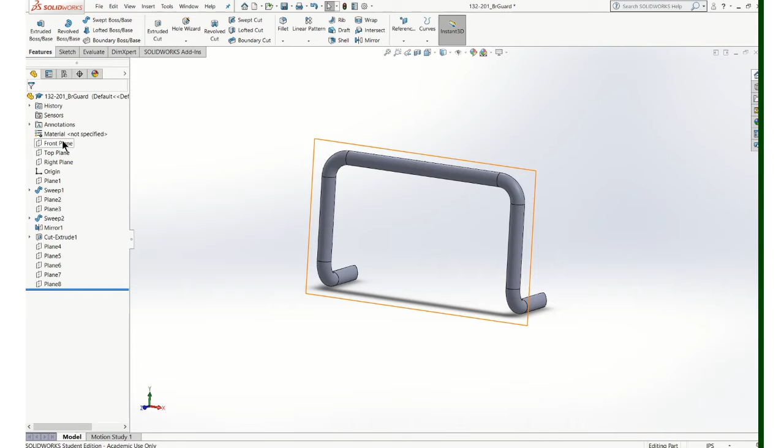Now, in order to constrain tubes, you're going to have to use work planes because you can't constrain to just the cylinders. So what I'll do is open up the individual parts, and I know that I'm going to need a work plane across here, and it's 9 inches down from the top. So the way I built my model was pretty much everything around the origin, so that's a really good way to do that when you're working with tubes, because then it's easy to just offset those by known distances.

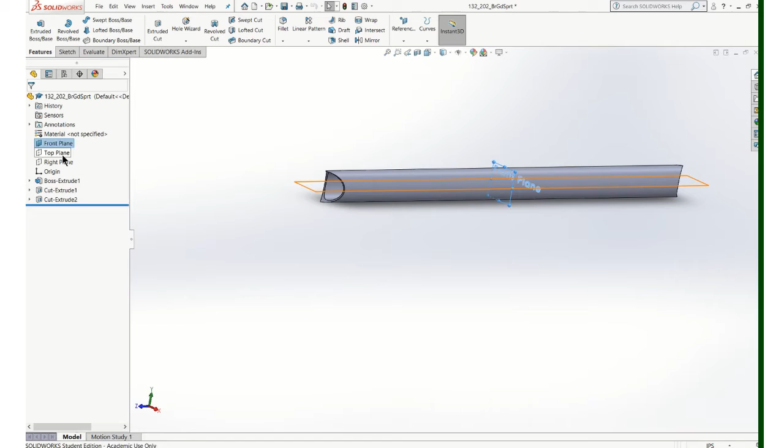So I'm going to take this plane and I'm going to offset it down by 9 inches because I know that that's where that tube goes, and I think I'm good with that. I will turn that one off for now. Likewise on this tube, turn all my planes on. Now if you don't have the planes, if you didn't build your model that way, you're just going to have to add some more planes by doing offsets.

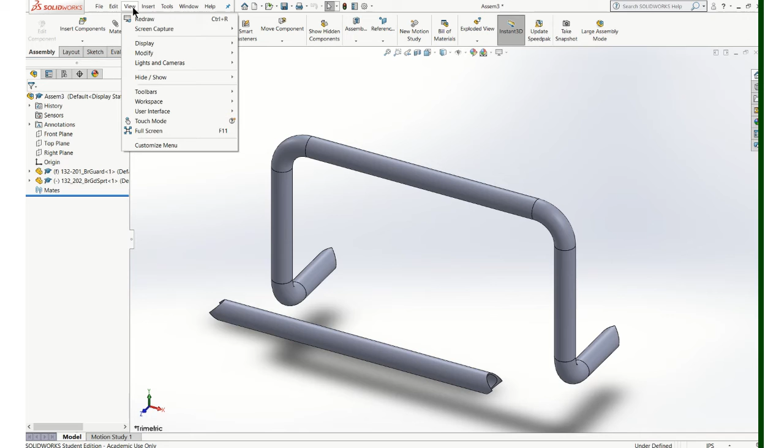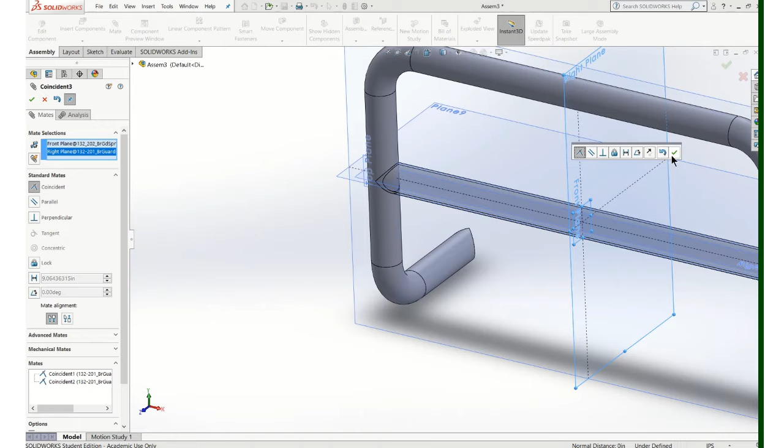Go to my assembly. Now remember, in order to see those planes, you'll have to turn on the plane. So go to View, Hide Show, and Planes. And now they're going to show up. So I can constrain that plane to that plane, this one to that one, and then I'll do that mid plane to that mid plane, and let's see what we got. Yeah, that looks good. So again, I just used the planes.

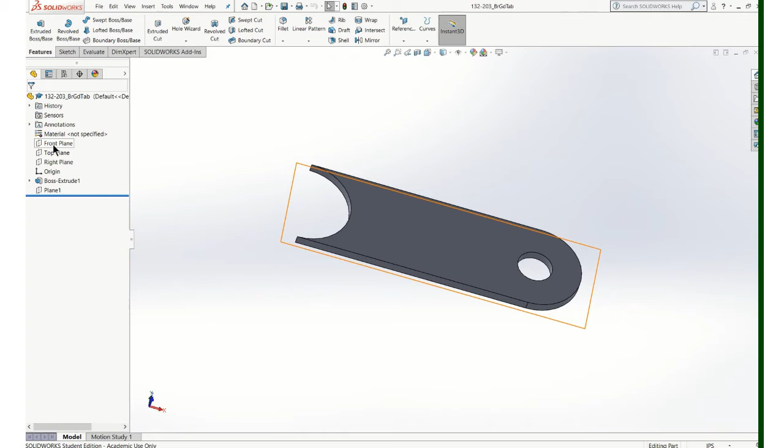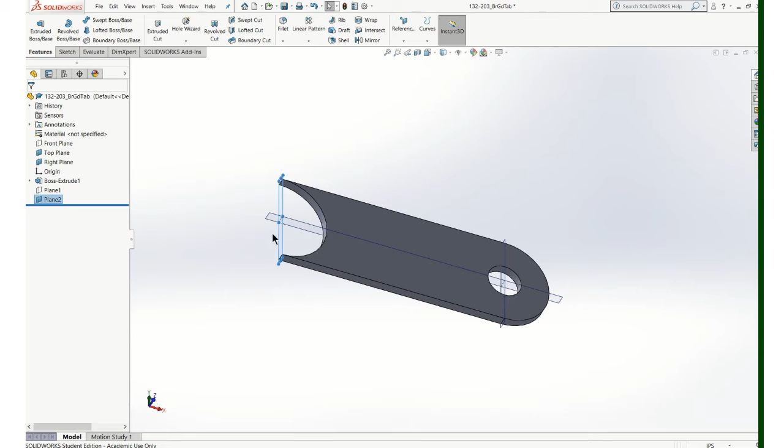Now in order to put those tabs, the light tabs on the side, I need to do something similar. Let's look at the tabs themselves. See what my planes are that I have. I have a mid plane there, that'll be good. That one's not so great, but I'll just create, I'll do an offset of that plane, and this tab is 5 inches long. So I'll have those two planes, and I'll just use the bottom surface of that tab. Let's hide that.

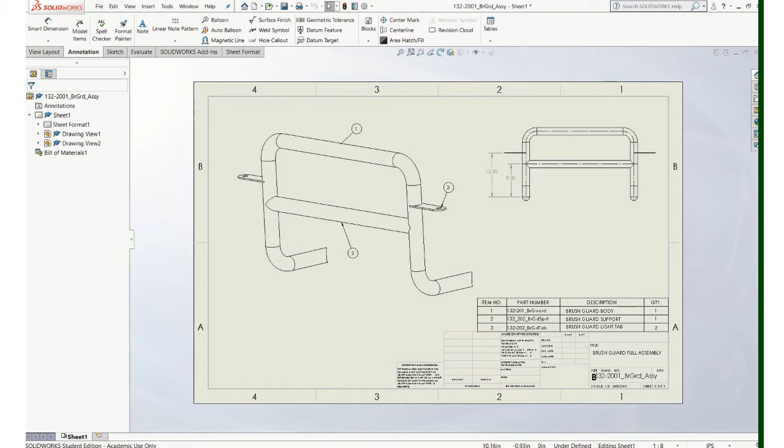So I need, according to my design, this light bar was, if I remember right, let me look at the drawing. I think it's 12 inches. Yeah, the tabs for the lights are 12 inches off the base. So I'm going to need a plane that's 12 inches off the base. Oops, go back to this, turn that top plane on, so it can be 12 inches from the bottom, or it can be 6 inches from the top. So let me put a reference plane from here. It's going to go down 6 inches, and I can use those other planes. Probably turn that one off now.

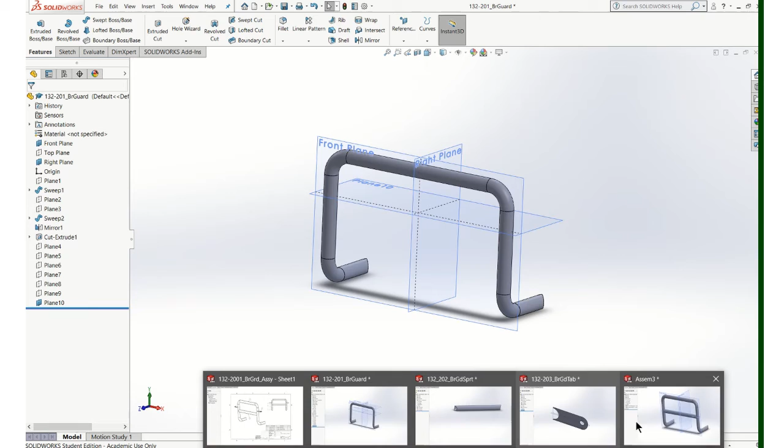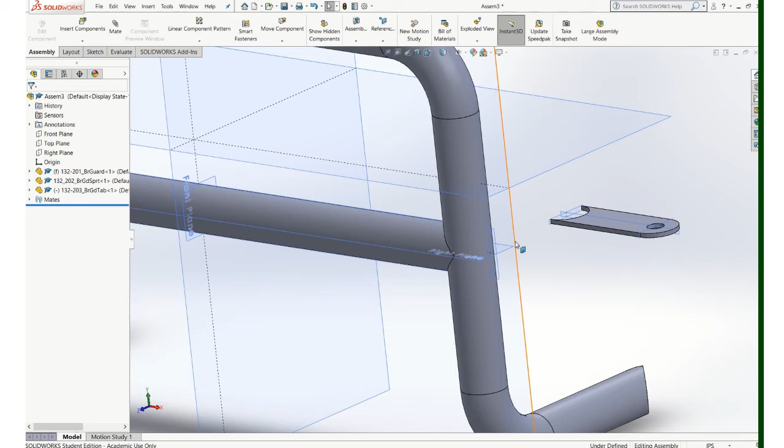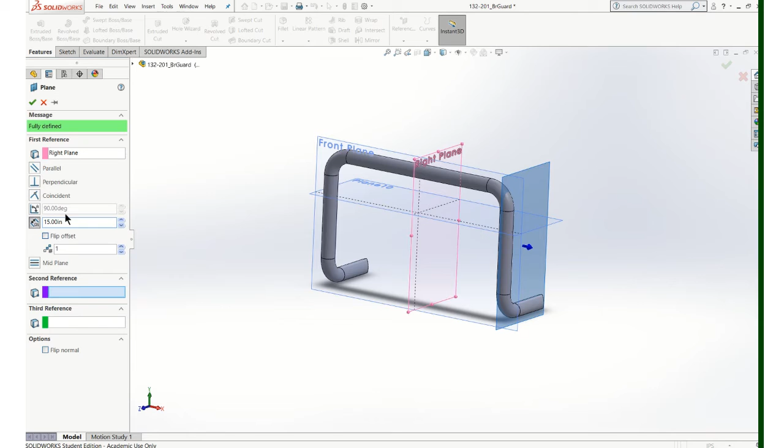Let me insert the tabs, and same thing, try to orient them like that one will be the one for that side. And I'll use my planes, and I'll constrain that mid plane to that mid plane. Let's see. Oh, I'm going to need another plane. I'm going to need to offset over to have a plane there. So that's why you make sure you have your part file open as well. And that's going to be a 15-inch to there. While I'm at it, I should put one on the other side. I'm going to have to do the exact same thing on the other side.

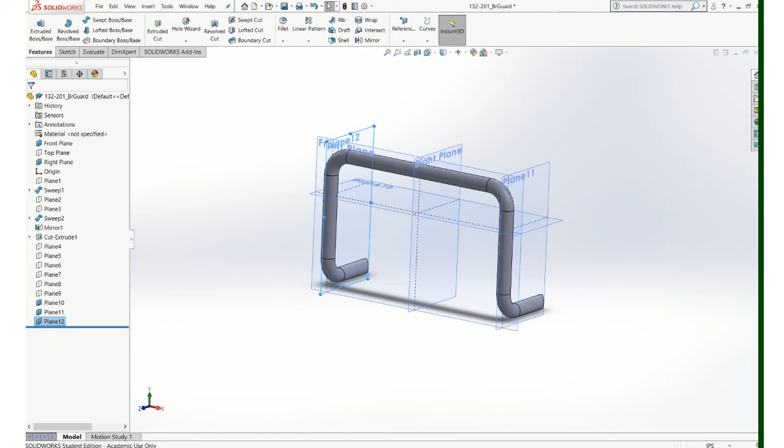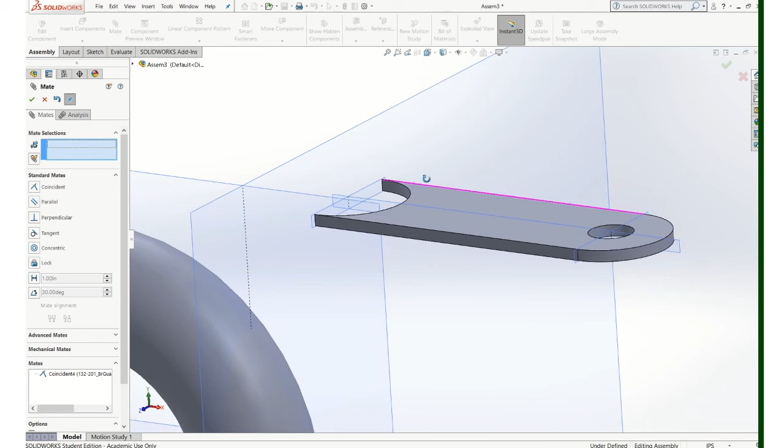It's not what I wanted to do. This one. Flip it the other way. There we go. So let's go ahead and constrain this first tab before I work on the second one. So if I do that plane and that plane, lines it up that way. That one's kind of hard to grab. That one and that one. And then I'll just use the bottom of the tab. I don't have any other directions to worry about.

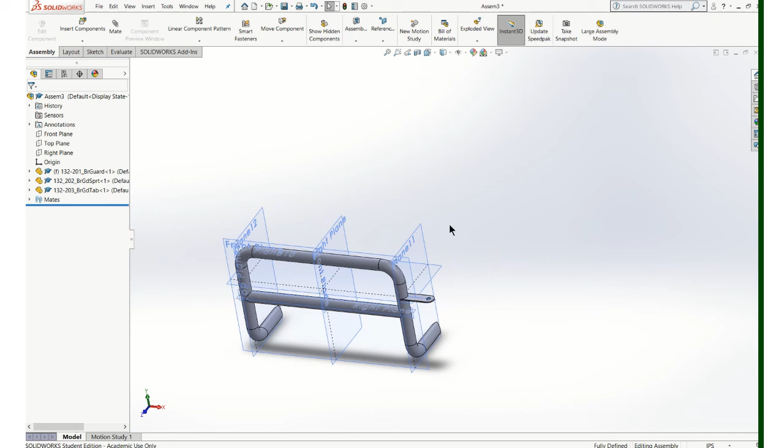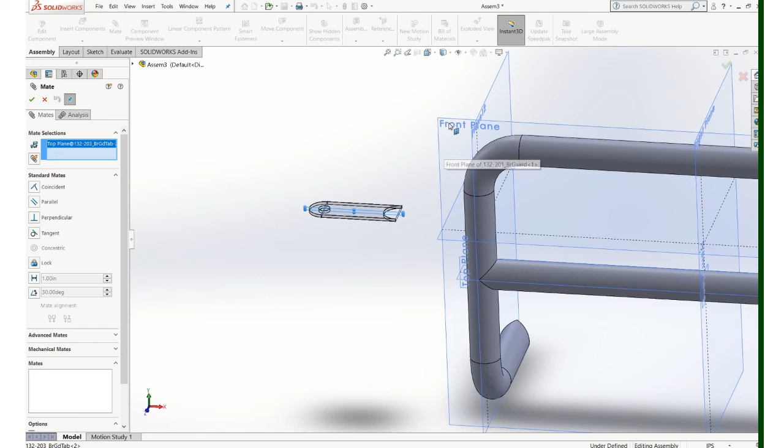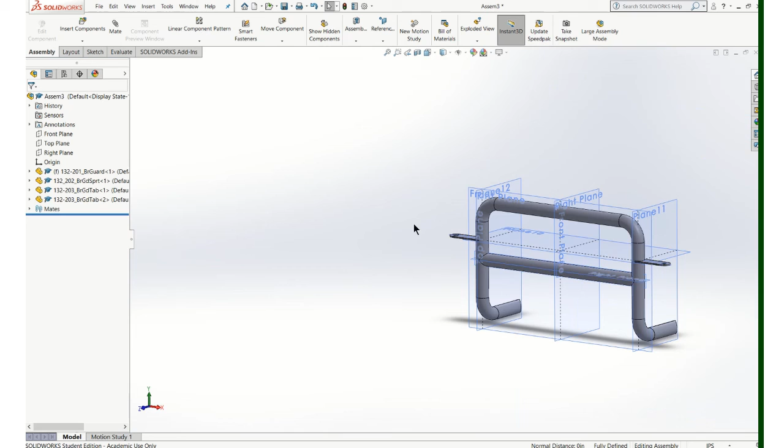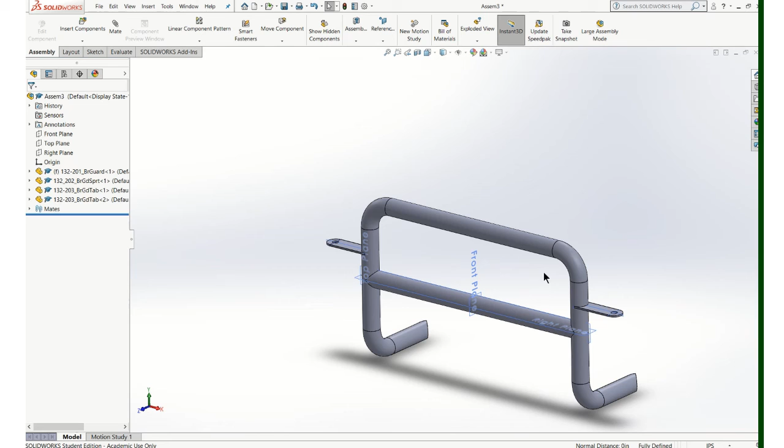It's close enough. Okay, so now I have that tab constrained, and I just need to do the same thing on the other side. So let me go ahead and insert another one of the tabs. Again, try to get it oriented as close as you can to the proper orientation. That'll make your life easier. Let's do the same thing with our planes. And again, I'll just use the bottom of that tab and that plane. And there's our assembly. I can turn the rest of those planes off, but you get the idea.